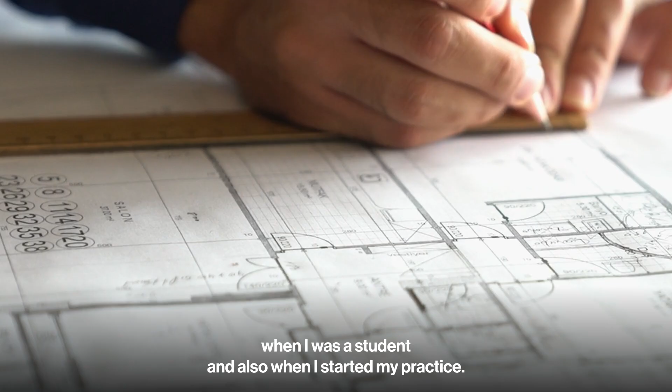So these two books - one is Charles writing about architecture and how climate in some sense is perhaps the most defining paradigm for building in our country and countries like ours, which was one book. The other one, The Shadow, really talks about the cultural and social aspects of shape, light, and its impact on the interior environment of buildings, specifically in Japan.

And when you go back, everyone's works - our peers and also the masters - they've all built within the Indian context, their work responding to various kinds of programmatic complexities, also responding to climate big time. So that's really, I think, where the title of the talk comes from as well - the idea that when we are building today, we are also building on the shoulders of people who've come before us, and knowledge systems that have evolved over centuries. And it's up to us as practitioners to start looking at how we might be able to bring those influences in today's time.

So I'm going to start with just the idea of buildings that one sees in India, a very typical typology, the temple, and the way that it's ossified in memory, but also how it's very fluid in the way that it finds its way within our cities as these found objects, where nature becomes a part of these religious symbols as well.

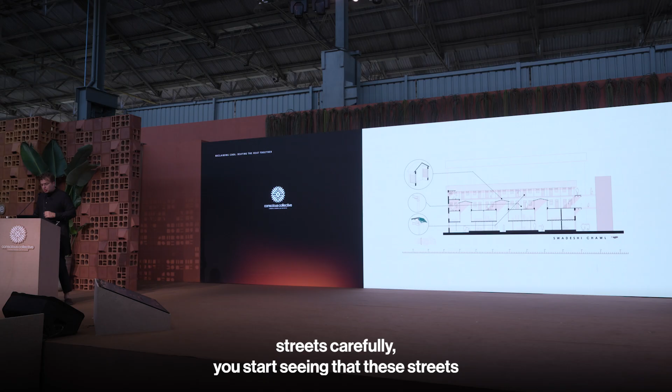But when you start looking at those streets carefully, you start seeing that these streets are actually ventilated through stack effects. There are ventilators that sit in the courtyards above that allow for the streets to be naturally ventilated. And this is just an image of one of those details. And the details don't stop there.

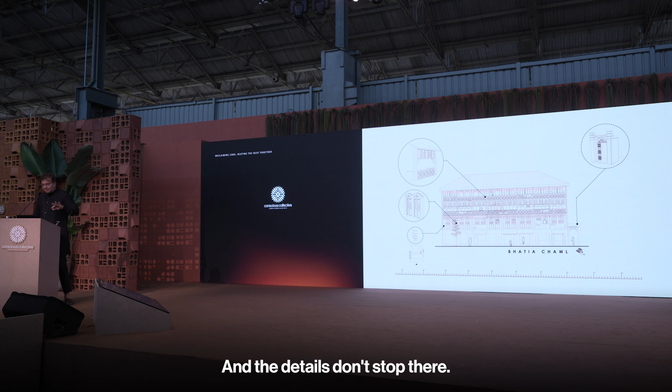In another project in the Bhatia Chawl, we found these incredible tripartite windows that open, with 3 panels on the same planar face that work for different times of day, allowing for cool breeze in the evening at a lower level, and a closed upper window during the day. That also works according to climatic devices.

But we've forgotten about all of this primarily because we've looked at development as not contiguous, and development as something new. I think that's where my talk is structured - the fact that we operate within continuities that, if we recognize, I think we'll be able to build much more sensitive environments.

This is really the last slide I have. In doing this, I'm using a title from an A.K. Ramanujan essay, which if you haven't read, I would strongly recommend you do. It's called An Indian Way of Thinking, where he talks about how subjectivity is perhaps the only Indian thing, where he argues that truth is subjective - if you look at the 300 versions of the Ramayana as it exists. In this subjectivity, there is also this idea of context, and everything within its context needs to operate in its particularly unique way. If you're able to learn this from history and what's happened before, I think these continuities would allow us to build much more sensitive environments in the cities we live in. Thank you.

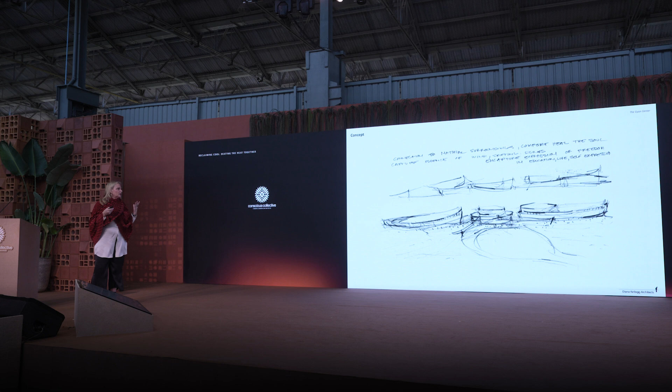So I started sketching sand dunes. I wanted a connection to the natural surroundings. I wanted the building to comfort and heal. And I wanted to capture the essence of wind, shifting sands, movement, the flow of water, and the expression of freedom, education, and self-expression.

I came upon the oval. There's a lot of reasons for the oval. One is it's actually a consistent symbol throughout a lot of cultures for female strength. And what I wanted to do was repeat that, which would actually be the symbol of infinity, like a chain extending as far as one could imagine, and the power of what the outstretched hand does to create effects in different parts of the world, where there's a ripple effect beyond what you create.

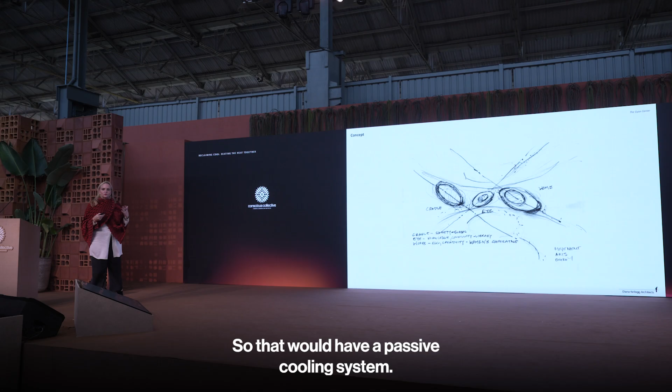That's the ideal. And then to have some organizing principles, I called the cradle the school, the eye, which was about having good knowledge. It was where there was a community center, a library, the computers, all in one building, with a passive cooling system. And then the womb, which is about creativity, women's cooperative, fertility. And then the axes between these buildings and what kind of energy that created.

So I'll walk through the school, because I'm sure many of you have seen it, but I'll point out some of the aspects that I think are relevant to this talk.

One thing you could see here is that people are always asking where the villages are, but the villages are actually quite close. The pictures usually seen are with the Thar Desert in the background—that's a nature preserve, so it sits in this amazing position right on the edge of that reserve.

This is one of my favorite photos, because it shows a grandfather bringing his two twin daughters to school for the first time. It represents a generational shift in thinking, and I find it very important.

The entrance to the school, the foyer, where they would be checked in by the headmaster or the teachers before entering the actual courtyard.

The actual courtyard has done some surprising things that I hadn't thought of before the design, but they really resonate now—because it's this oval, and it blocks out the rest of the desert. All you perceive is the sky, and the sky sort of symbolizes knowledge. How high can you go? How high can you go if you're supported?

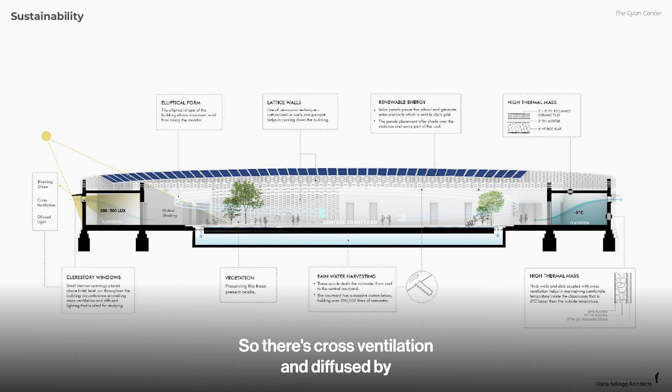Many architectural details I used from the Jaisalmer architecture, because my feeling was if they had lived for centuries in this environment, they had created tools to deal with the heat. One of the very simple ones was the sunshade, which you can see all the way to the left, which keeps the rain out as well but also blocks the glare. So there's cross ventilation and diffused light because the clerestory windows are high.

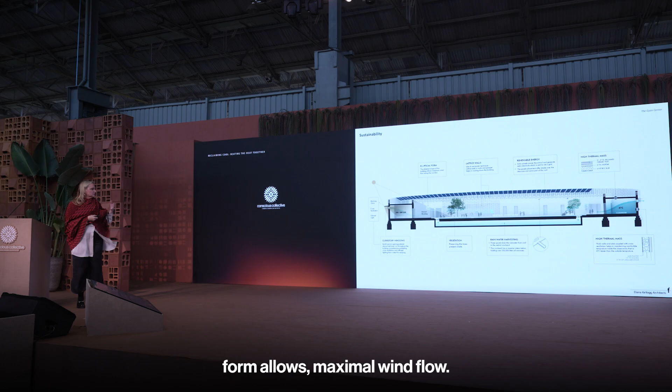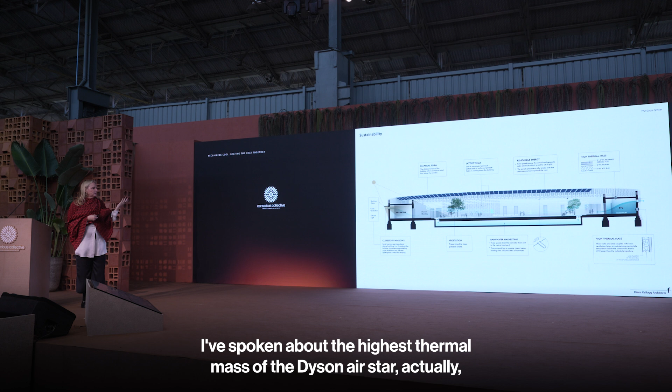The elliptical form allows maximum wind flow. The lattice helps in cooling the building down through the Venturi effect. The solar, I've spoken about. The high thermal mass of the Jaisalmer stone is actually one of the biggest elements in keeping this building heat resistant.

When I had arrived, I had spoken to the contractors and general contractors about what we could make this building out of. Naturally, I thought concrete. It's a low budget, and the client is the girls, and the ultimate goal was to actually make a place for them. I wasn't focusing so much on sustainability. I was focusing on comfort and keeping the building cool for them, but not air conditioned. Air conditioning would have been inappropriate.

First of all, we don't have windows in this school because there's too much shifting sand, and windows are problematic when that moves. So in an early interview, somebody asked me if there was air conditioning, and I simply said no. But the headline from that moment forward was, 'Diana Kellogg produces school in the desert that needs no AC.' That's actually not what I said. I knew the dangers of overcooling the building, because these girls lived in neighboring villages without air conditioning, so I wanted to make it more comfortable for them. That's an important part of when we talk about cooling and heating, it's relative to the place you're in, among many factors. So pulling in air conditioning isn't necessarily the right thing.

More diagrams. This is what happens at night: the night air enters and the stored heat escapes, which cools the building.

Another thing that was really important to me was getting the local people involved, and there are many ways to do that. Obviously, our crew was all local. There was also a neighboring town which had a number of men who actually went to Mumbai to make furniture, and I said, why can't we get them to make furniture for us? It makes practical sense—it involves that community, and children's furniture needs to be repaired quite frequently.

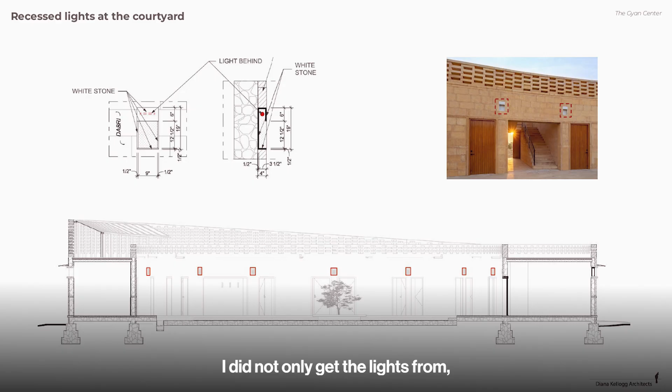Another example of the ways I worked with the craftsmen: I did not want to get the lights from Delhi, which is what they were insisting upon. Instead I told the electrician to make the light fixtures. He said, no, I can't do that. So instead I just told him to wire a socket to a place, and the masons would make the enclosure.

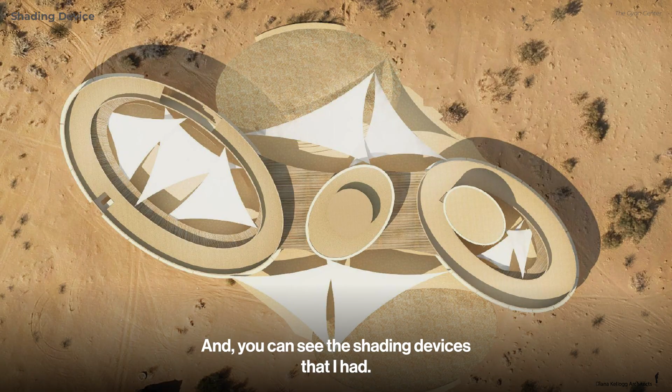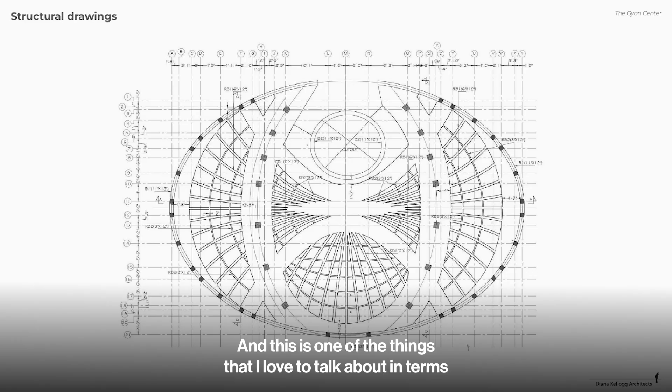So this was for the second phase, and this is one of the things I love to talk about in terms of coming from the West with my education and learning from India. I had a very prominent engineering firm in the U.S. take this structure and put a grid up top.

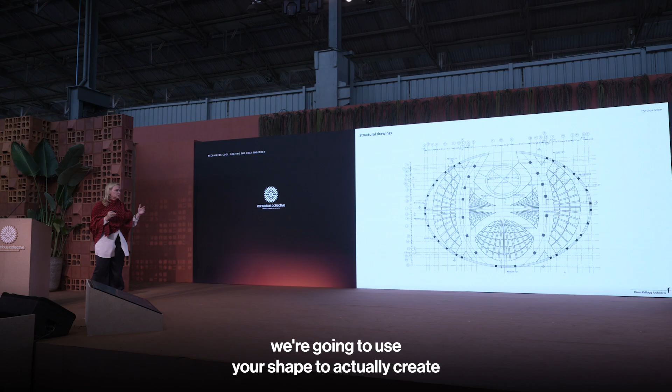When I showed it to the contractor, he said, there's no way, Diana, this is going to collapse the building. I found an amazing Indian engineer who said, we're going to use your shape to actually create the structure for the building. He drew this beautiful design in which we were going to put clay pots inside, which is actually something done in Jaisalmer—it's an age-old building technique.

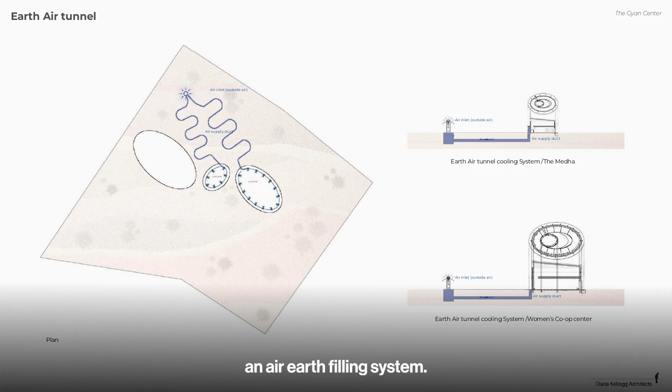Also, for the second two buildings, we were going to use an air-earth cooling system because, as I said, one was for the computer systems and library, and all of those needed some kind of passive cooling.

So here's the building that was intended to be—maybe will be at some point—three different structures.

This is actually a video which I'm not going to show because I don't think I have time. Oh, I guess I am. Enjoy the music.

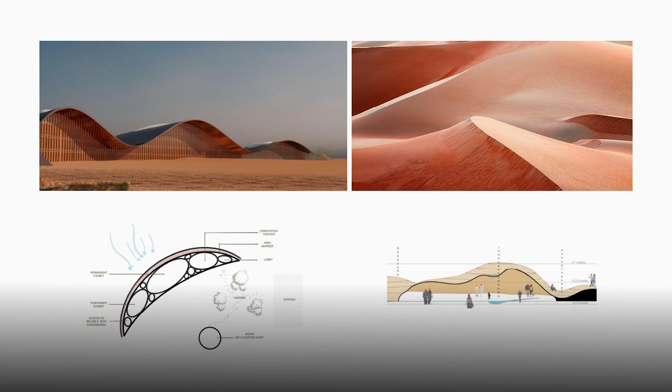So we developed a way of approaching these projects in different countries, because I keep getting asked to do things in places I've never been before. What we do is start with a site analysis, very thoroughly with our own information—we do a sun study, a wind study. It's much more extensive than this.

This is actually something I started after this work, because I get asked to do projects around the world—we have someone from Zimbabwe who's waiting patiently for an orphanage or school. The idea was to support many of the things I had learned during the incredible experience I had in India. So we wanted to support local crafts and their ability to use multiple materials in a very surprising way—we have a line of lights or furniture.